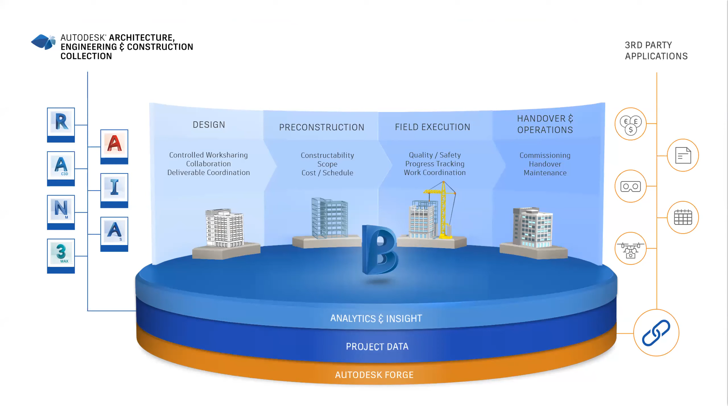I won't spend too long talking about what BIM 360 is fundamentally, but this is the platform in one slide, and we're really focusing today on this project data vertical or horizontal piece that sits beneath all four of the design verticals. We're also going to be focusing on the design module here, so I won't talk too much about anything else today.

If you are brand new to BIM 360 and want more information, you can always search 'BIM 360 help' on Google. If you jump to that website, there's a really nice visual workflow page to help you get set up. If you have just acquired a BIM 360 license, you can work through this web page and click these buttons to help you move along your journey, whether it's signing into Autodesk for the first time, accessing BIM 360 for the first time, all the way through to setting up projects.

Where I'm starting today is really in setting up roles, setting up an account, and then moving through the setup of a project into the design phase. Before I start, if anyone has any questions, please feel free to type them in the Q&A box at any time - I should have mentioned that during my introduction, but I've just forgotten.

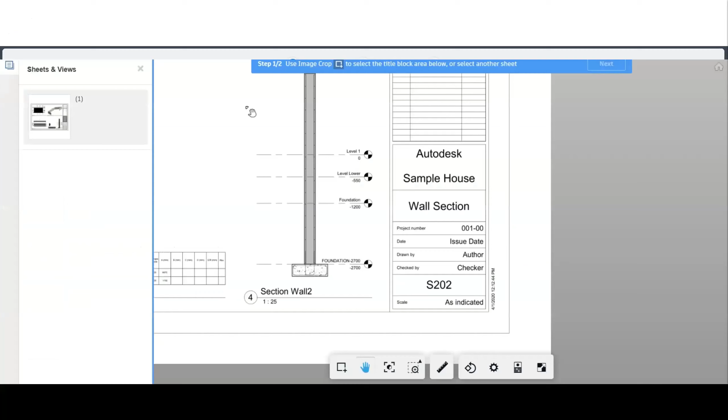So as you go through this workflow, it's going to tell you what it's doing. So it's going to scan the drawings, get the drawing names out, get the drawing numbers out. It's going to extract that data and then publish it back into BIM 360. So as you upload a series of drawings, it's going to ask you for a template. The first time you do this, you won't have a template, which is fine, because it will ask you to define one. So what that looks like is pretty straightforward. You can just follow the instructions.

So it's asking you to select the entire title block area. So here we are selecting this area. You have to do this if you've got a horizontal title block or a vertical title block. You'll need to have two different templates. So once you've selected your area, give the title block a name, the template a name, so you can reuse it later on down the line. And then you have to select the area where the drawing number is and do the same thing for the drawing title.

Once you hit save on that, BIM 360 will analyze the list of PDFs that you are going to upload. You can select them all here, and it'll run through that list, select a template, and it'll extract out all the data. This might take a while depending on how many drawings you are uploading. I think there is a limit on the maximum number you can do at one time. I can't recall at this point in time what that limit is, but it's in the hundreds, that's for sure.

So once that has happened, it'll publish, and what you end up with is the drawings, the PDFs that you've uploaded in BIM 360 with their drawing number and drawing title assigned to them, all kind of automated. So you can see this image here is what the PDF looked like before we uploaded it, and this is what it now looks like once it's in BIM 360.

So probably my favorite part of BIM 360 Docs is the activity log. So in the back end, everything gets tracked inside of BIM 360. So there's really no hiding. So in this list here, you can see that the last thing I had done was publish all of those documents that I just showed you. This will look at if drawings have been deleted. It will look at if people have opened drawings. Everything gets captured here, which is really, really important.

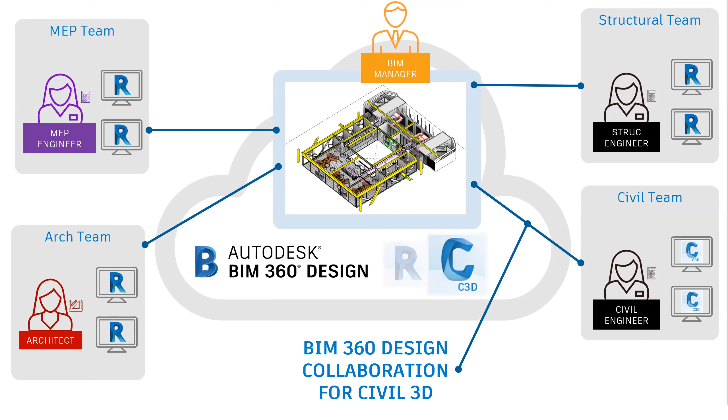I apologize, it is buildings focused, not necessarily civil with that big building in the middle, but this is a typical project that would live in the cloud. You will have different disciplines contributing to one single source of truth in the middle, living in BIM 360 up in the cloud, either using Revit or Civil 3D. But for today's example, we are really focusing in on this civil area using the design collaboration tools.

So fundamentally, and it's important to show this slide because I've had a lot of people ask me this, we are working with file locking, locking a DWG. Now, people have asked me, does this mean you can have multiple people working inside of one DWG? The answer is no. If you are familiar with the Revit workflow for BIM 360 Design, you can have multiple people inside of a Revit model. That's not how this is set up. By the nature of a DWG, you can't have that. So you can't have multiple people inside of one DWG, if you're curious.

Because files are able to be locked, you can see if a file has been locked inside of Civil 3D, but you can also see that from the web browser. So you can hover over that little padlock there and you can see that it has been locked by me. Again, a really good visual way to see who has what drawings open when we are working remotely.

So if we start to look at the workflow itself, as you can see, I'm using 2020.3 here, but you need 2020.2 as an absolute minimum. Civil 3D will start to look a little bit different. You can see the list of DWGs we have here. Some of them are stored on the cloud, some of them are stored locally. That gives you an indication that you are now able to work with cloud drawings.

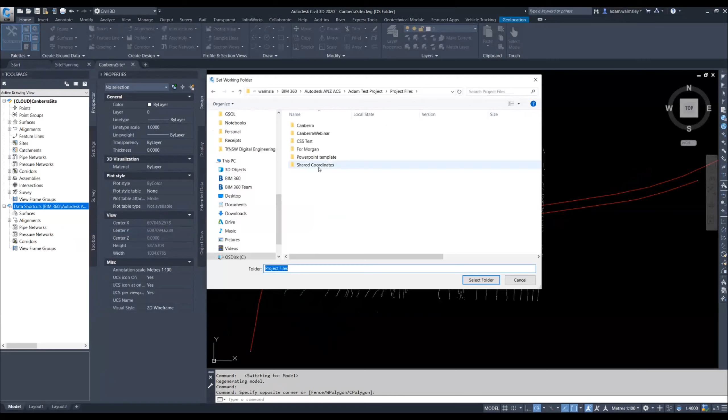So this drawing is locked because I've got it open. Let's jump into that drawing and look at adding some data shortcuts. It's pretty straightforward to do this. It works the same way as Civil 3D does when it's not on the cloud. You need to set your working folder. In this case, I'm defining a folder that lives on BIM 360, and you can see that it does reference BIM 360 there.

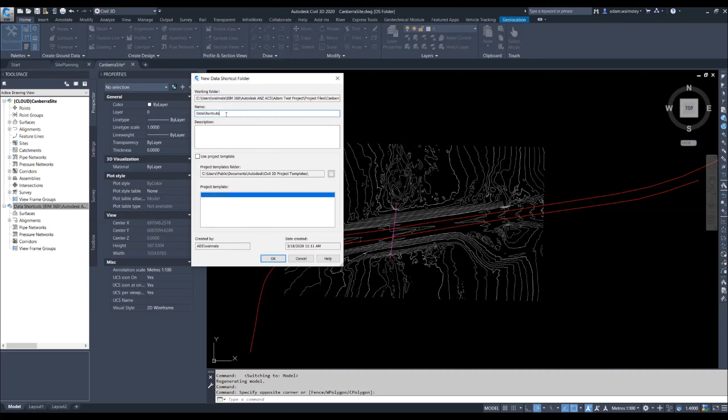And then we need to use our template to set up the data shortcuts folder itself. So we give it a name. We're using that particular project template. You guys might have your own in-house one that you rely on.

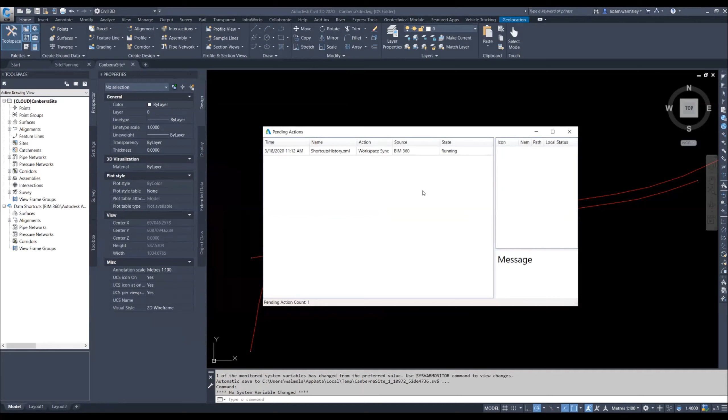Now what you'll see happening, and this is probably a little bit different, is we're using the desktop connector. The desktop connector is a good little tool that you use to monitor the activity happening between your local machine and the cloud. So you can see we have some activity happening here. There's an XML file being synced. This is sending that data shortcut up to BIM 360. It shouldn't take too long; it's a pretty small file. That's happened. Get rid of that.

Bring back our web browser, and you can see we have the data shortcuts folder created, as well as all of the subfolders that we have specified inside of that template. So you don't need to create any of these folders manually inside of BIM 360. It does it automatically if you are using a template.

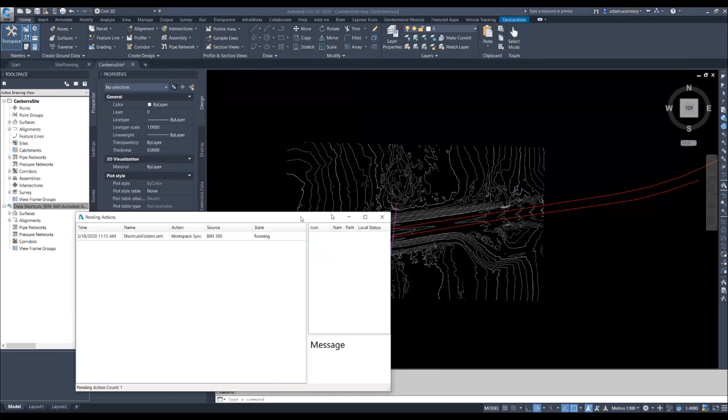And then the last thing we need to do is to create some data shortcuts. So again, pretty straightforward. There's nothing really specific to the cloud here. We're going to select a surface and 2 different alignments. Again, we'll look at the desktop connector. It's going to come up and we'll see the data that is getting published up to BIM 360.

So you can see there it's publishing multiple files. That doesn't take long because they are quite small as they are XMLs. Come across to the web. We can go now through our shortcuts folder and we'll see that we have 2 alignments there that we've just published, and we've got our surface there. They're XML, they're really small in size, so that upload is really quick. It doesn't take that long at all. So that's kind of data shortcuts in a nutshell.

Now we'll have a look at how we can start to use xrefs. And there's a couple of different methods here. What I'm going to do is upload an xref to BIM 360. And the way I'm going to do that is by simple drag and drop inside of Windows Explorer. So we've navigated through to the folder we want, and I'm just going to do a drag and drop. You could do this through the browser if you wanted to, but I'm just showing you another way of uploading

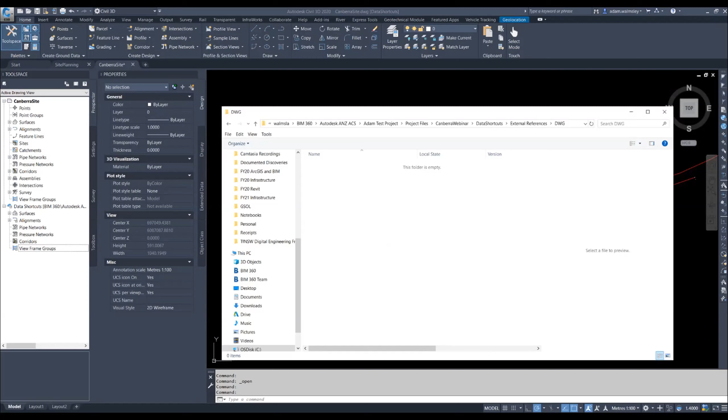DWGs, straight and simple. So you can see there's a structural culvert here, and this transferring the files window is telling you that there is a connection happening between your computer and BIM 360. If you look at the desktop connector, it would be telling you that as well. We jump over to the browser just to show you that there is that DWG there that has been uploaded via that drag and drop method.

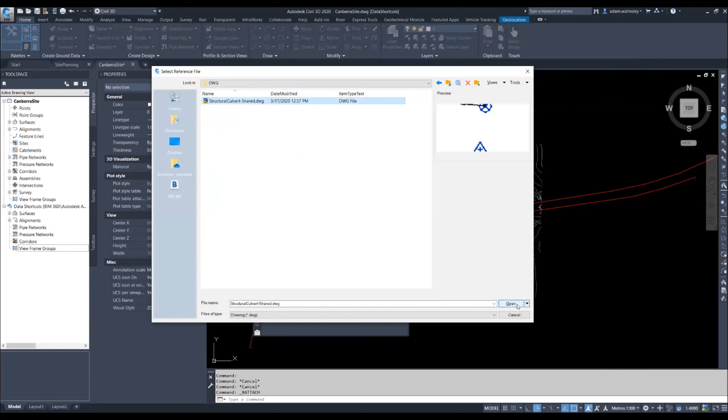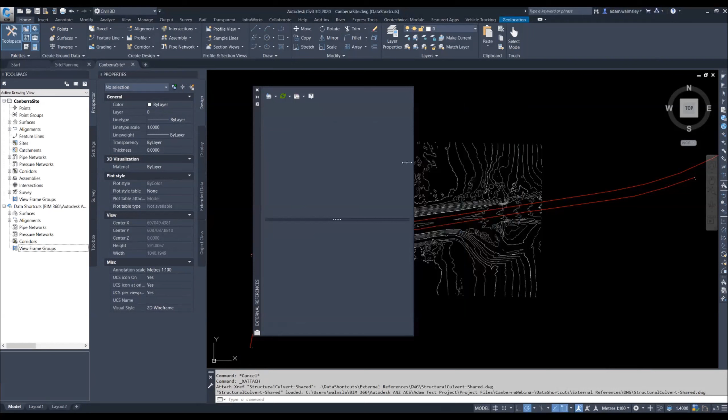Fire up the xref command, pretty straightforward. Navigate through to BIM 360, and we can select the xref that we have just published by drag and drop method and load it into our workspace, as I will do right now. Once the DWG comes in as an xref, if you were to click on it, there you can see the pathing. So you can see that pathing is definitely pointing to BIM 360. You know that drawing has come from the cloud. It's not living on a local file. And you can look at that folder structure there through the browser or through Windows Explorer to see that pathing.

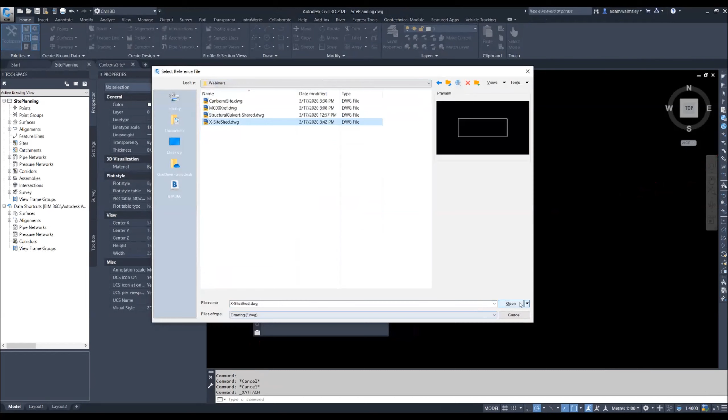The second way of working with xrefs is a really nice way, it's probably one of my favorite features of BIM 360 Design for Civil. So what I've done is I've created a new drawing called Site Planning, and this has been saved locally, for example, and I'm going to upload an xref that lives on my C drive. So in this case, it's living on OneDrive. It's not on my desktop, but it's definitely not on BIM 360. So yeah, this could be coming from a file server, or it could be coming from anywhere, but I'm going to show you what happens when you work in this particular way.

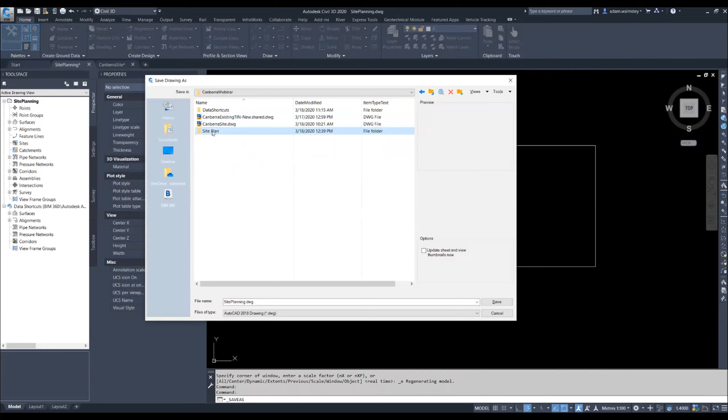So the xref has been loaded into the drawing. I'm going to do a file save as of this particular site planning drawing, and I'm going to save it for the first time up in the cloud. So I'm going to navigate through to my folder structure, create a new folder called site plan, and I'm going to dump that drawing in there, and it's going to upload that site plan drawing, but also upload the xref that goes with it.

So you could check the desktop connector and see that upload happening. You can see the site planning DWG, it's doing its thing. Now, I think we have to close this drawing first. Is that what I do? Yep, close this drawing.

Now, jump back over to the browser, you can see we have the DWG that's been uploaded, but I also want to talk specifically about this related data folder. So if you were to upload a drawing that has a localized xref, BIM 360 will replicate that structure from your file server or from your desktop and put the DWG in this related data folder. Because it recognizes that, hey, this is not a DWG that lives on BIM 360. It's come from somewhere. We're uploading it, so we need to put it somewhere in the cloud.

So just to show you this pathing, you can see I'm navigating through to that FY21 infrastructure folder into the webinars there, and the x-site shed is the DWG there. The pathing in Windows Explorer matches the pathing that you see beneath that related data folder.

Now, what you can do with BIM 360 is physically move that DWG. It's not best practice to keep that xref there. You definitely want to move it to the xref folder or whatever your company's design standards suggest. So we've used the cloud to move this DWG. Now, if you're working remotely, someone who is not using Civil 3D can move those xrefs around.

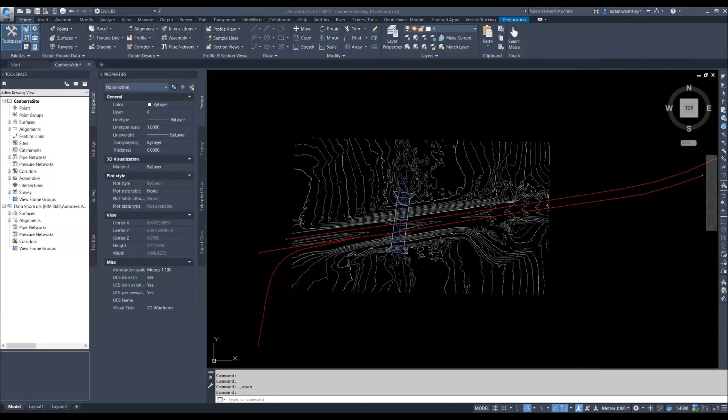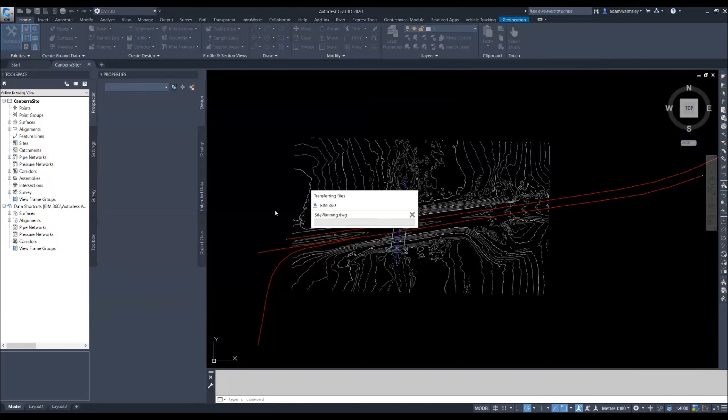And this is the beauty of the workflow: now if anyone in your project opens up that DWG, the site planning drawing, the xref will stay in there. The pathing will update itself in the background. You can see here that because we've uploaded it and we're opening it for the first time, you get that transferring files window. But there's our xref. It's pretty small. I haven't made anything too complicated, just to keep it basic for today's session.

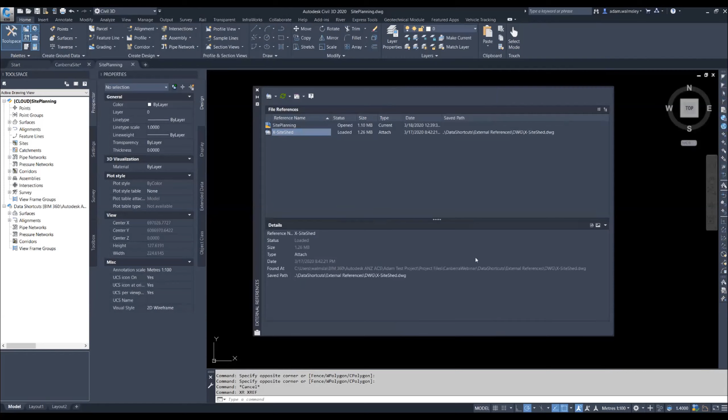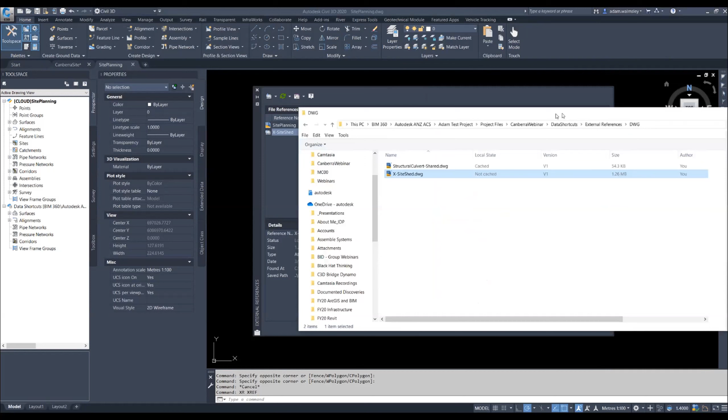But when you look at the pathing of this xref, you can see that it has repathed itself to point to BIM 360. So this xref did come from my local. I've saved it to the cloud. I've moved it around up in BIM 360, and it's updated the pathing for me. So it's a really intelligent way of working with the DWGs that live in BIM 360. If you've got remote teams, no one's going to have missing xrefs anymore because the cloud can maintain that for you. So it's a really nice feature that we have there.

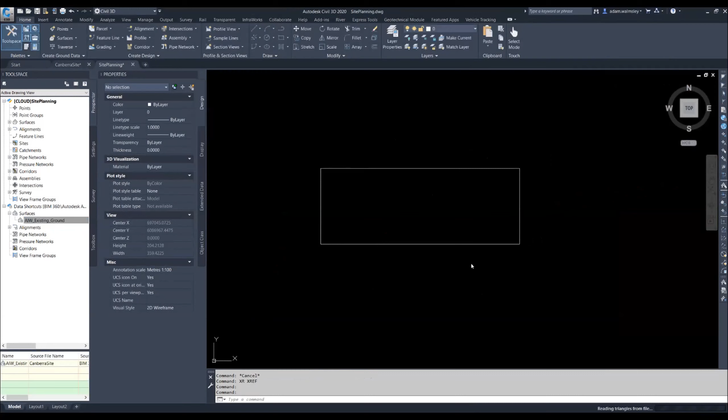Now, the last step in this process, just to close things out, I'm going to create some of the data shortcuts in a new drawing. We started off by creating some data shortcuts, the surface and the two alignments. I'm just going to create those references in this new site planning drawing that I've just created and uploaded to the cloud, just to close that loop of this workflow. So you can see here, we'll bring in that alignment, and those data shortcuts are coming from BIM 360.

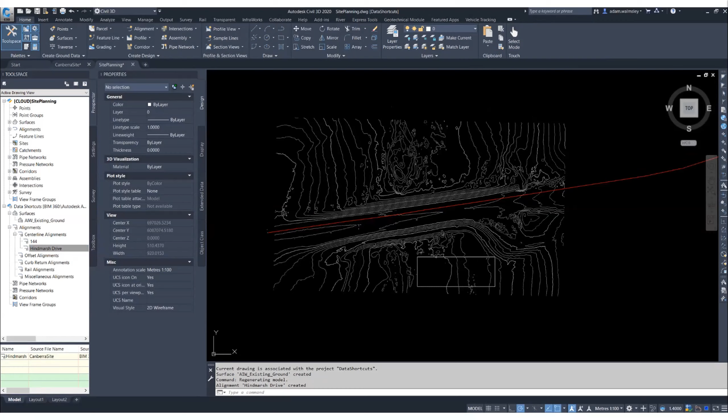So in a nutshell, that is the workflow around BIM 360 design collaboration for civil. It's pretty straightforward. It's not too complex to understand. What I do also want to talk about is some versioning, and I'll talk a little bit more about this. But every time you upload a new DWG, you'll get a new version, which is different to revisioning.

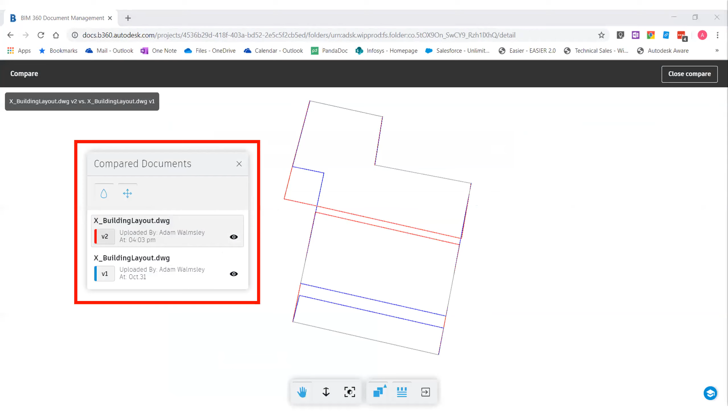And there's a nice little feature inside of BIM 360 Docs that lets you compare DWGs or different versions of a drawing. So I'm overlaying two different versions, V1 and V2. One goes red, one goes blue, and you can see the changes just like that. And there's a little bit more to it in terms of 3D models, which I'll talk to.

So the third part of today is to talk about some of these processes in BIM 360. We've started off by setting up a project. We're now collaborating in the cloud, and now we're doing some down-the-line processes on those documents. So first off is the ability to work with Microsoft Office.

Inside of the browser, you can actually upload and store Word docs, Excel files, and PowerPoint files. There are some limitations on the file size, but the beauty is that you can have schedules, design reports, fees or whatever it is, and you can have people working on those in the browser, as opposed to having to email documents around to different teams.

Markups inside of BIM 360: as you would expect, there's tools in there. So we've uploaded some of those PDFs through the OCR reading technology. Now we can start to mark them up. You can work with polylines, pretty straightforward. Adding text, callouts with leaders, as you would come to expect.

You can add revision clouds. You can even do some general drawing stuff, so rectangles and closed polylines and things like that. And then some nice things around colors and creating fill patterns. Also important is that markups don't need to just be done in a browser. They can be done via mobile apps, both Android and iOS. So when it comes to markups, everything gets captured.

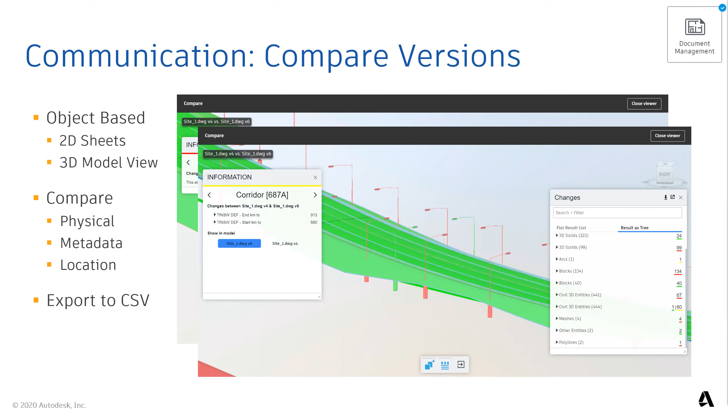So we can also use BIM 360 for issues. As opposed to covering a drawing with markups, we can drop these pins on a 3D model or a 2D drawing and have an issue get created that is trackable. You can invite more people into it and things like that.

Issues are customizable. You can have them based on different disciplines, or based on clash detection, for example. And there is a workflow associated, so you open up an issue, you answer it, and you close it.

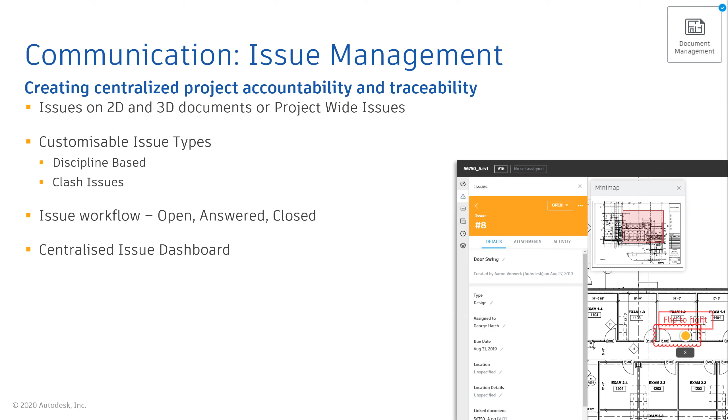There is a dashboard where you can view all the past issues from a management perspective, and you can even have notifications of when issues change status through a workflow, or if someone gets invited to participate in an issue. So the whole idea around this is trying to

work through these issues in the browser as opposed to having to go out to Excel. I've been involved in projects where you have a series of PDFs on one screen and an Excel document on the other, and you have to type in the drawing name that you are making a comment on, put your initials, describe your thing, and it's two separate things.

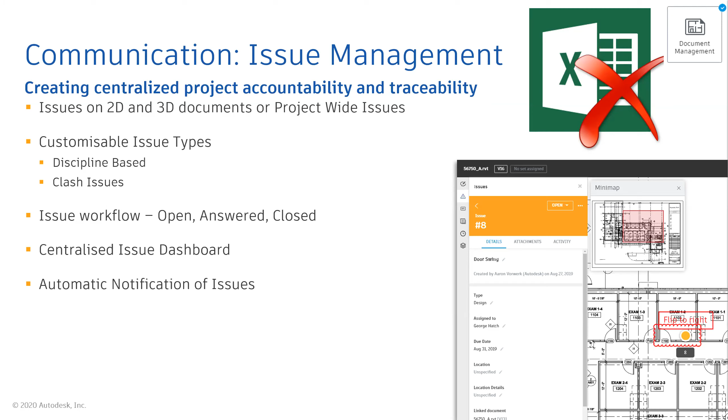Whereas with BIM 360 and issues, you're placing the issue directly on that particular drawing, and there's some intelligence around that as well. So all of the issues are tracked. You can search them, see whether they are open, answered, or closed. You can see the title, the type it's related to, who the issue has been assigned to, what company, when the due date is for any action, and if there are attachments or comments added to that issue.

So if you click an issue, this is what it looks like. It's really important to know that it automatically will link to a document. So if you've dropped a pin on a particular drawing, the user can now click this blue link and take them directly to that drawing.

So they don't need to flick through 100 PDFs to find the correct drawing they're looking for. They can get taken directly to that issue or to that drawing based on the issue. You can add attachments, take photos, or add sketches if needed. There's also an activity log, so you can watch a history of that issue, who's commented on it, who's invited people in, and use the @ symbol to mention someone, like on Facebook or LinkedIn, tagging someone to invite them to contribute to an issue that's been created.